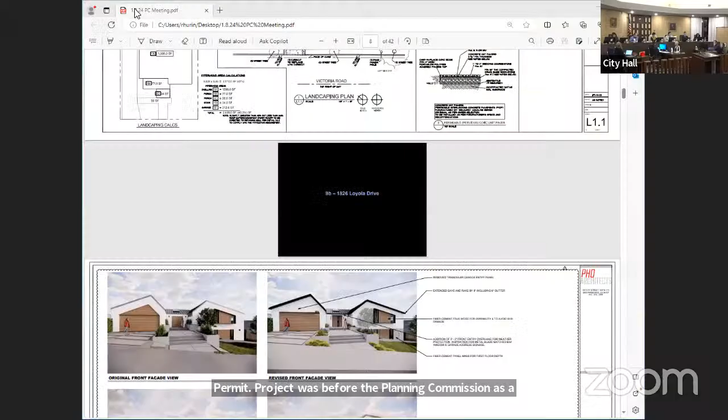The project was before the Planning Commission as a study item on July 10th, 2023. The applicant has made changes to the project based on the commission's comments at that hearing, and those changes were detailed in the response letter that was part of the attachments for the project. The applicant also had story poles installed and certified for the project.

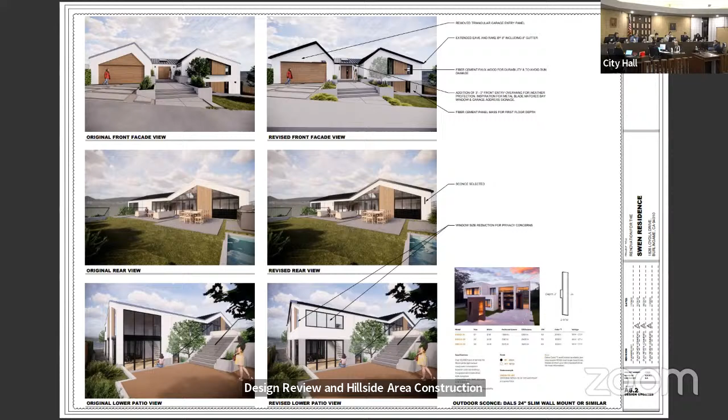There are suggested findings for both design review and hillside area construction permit in the staff report, and I can take questions of staff at this time. Great, thank you. Do we have any questions for staff?

Okay, seeing none, I'm going to open the public hearing. Would the applicant please come forward and state your name and anything else you would like to add about your project?

Hello, my name is Daniel from PHD Architects. Good evening, commissioners and staff. Appreciate your time tonight. Hope everyone had a wonderful holiday. Happy New Year, actually, as well.

We're here to present the single-family home renovation project for 1826 Loyola Drive on behalf of the clients. We appreciate the opportunity to follow up on our design study review that we had on July 10th last year for the project, and the opportunity to address the feedback we received.

Since that hearing, we've worked with the homeowners on updating our proposed design for the project and incorporated all the feedback you guys provided while still retaining the overall modern aesthetic of the design. During this period, we also worked and diligently reached out to staff as well as commissioners to review our project individually through Zoom meetings. I appreciate that we were able to meet with many of the commissioners, so thank you for that.

Tonight, I'd like to spend a little bit of time reviewing the planning response letter we prepared, which we also put together with the package for the entitlement plans, to show how we addressed each of the commissioners' items with respect to the project.

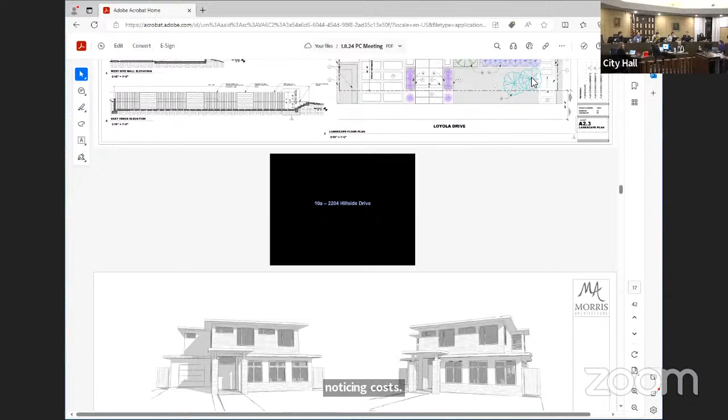Were any commissioners not able to visit this project, or do any commissioners wish to note any ex parte communication regarding this project? Seeing none, let the record note that all commissioners present have visited the project site.

Can we hear the staff report, please? Yes, the applicant is proposing to replace the existing split-level single-unit dwelling at 2204 Hillside Drive with a new two-story single-unit dwelling with an attached one-car garage. The applicant is requesting a special permit for the attached garage. The project includes a new detached accessory dwelling unit, or ADU.

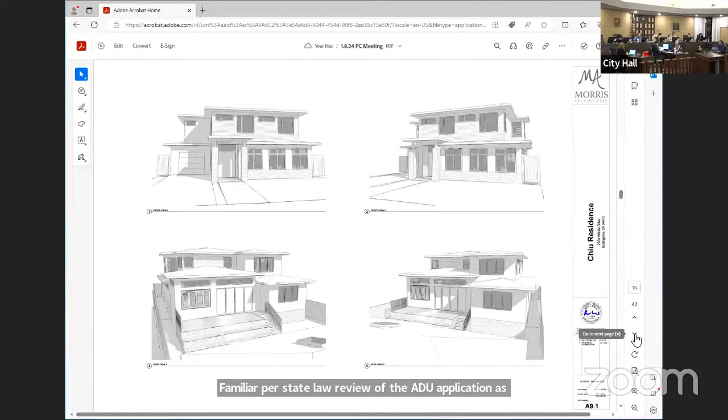For those who are not familiar, per state law, review of the ADU application is administrative only. Staff has determined that the ADU complies with the ADU regulations. So in summary, the applicant is requesting design review for a new two-story single-unit dwelling with an attached garage, and a special permit for that new attached garage. The applicant is available to answer questions, but first I'm available for questions of staff.

Thank you. Do we have any questions for staff? Yeah, I just wanted to clarify. At the rear of the house, is the first floor has an 11-foot plate height? I'm sorry, I forgot to bring my reading glasses, cannot read anything here. 11.3 plate height? Correct, so that's... perhaps we can ask the applicant, only because I don't have the plans with me myself.

That's maybe a good question for them to help answer. That's my question mainly, is that doesn't have to come as part of the staff report. That doesn't need to be notated or doesn't require anything special. Special permit, yeah, does it? That plate height at the rear? I'd have to see the plans, but generally there's stipulated plate height for first and second floor, and anything beyond that, 11 feet would be beyond that and would require special permit.

Yeah, so that's why I have the question, because it looks like it has the 11-foot. Is it part of the ADU, on the rear? No, it's the back of the house. Okay, on the rear elevation, we'll have to check on that. Doesn't it say first floor plate height 9 foot? But on the rear it goes higher. Well, we can ask them. Okay, well, we can ask them. We can certainly look into that and get a response for when this returns. This is a study item at this stage.

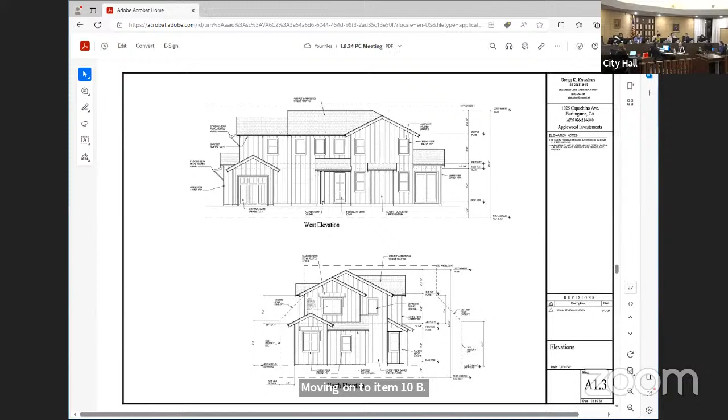Moving on to item 10B, 1025 and 1029 Capuchino Avenue. Were any commissioners not able to visit the project site, or do any commissioners wish to note any ex parte communication regarding this project? Seeing none, let the record note that all commissioners present have visited the project site.

Can we hear the staff report please? In 2017, the Planning Commission approved a project on this site for design review, conditional use permit, and front setback variances for a total of 4 units. The design was 2 attached duplex units on each lot. The permit to build the original project has expired, and the new owner is requesting design review, front setback variances, and a minor modification for parking space width for 4 units, or 2 detached units on each lot.

The site consists of 2 interior lots that are zoned R2. There's an existing underground culvert that runs across the site, extending from the front left corner of 1025 Capuchino Avenue to the rear right corner of 1029 Capuchino. There's a 10-foot public utilities easement that runs behind the rear property line of both lots. Public Works Division regulations do not allow any permanent structures to be built over the culvert or over the easement.

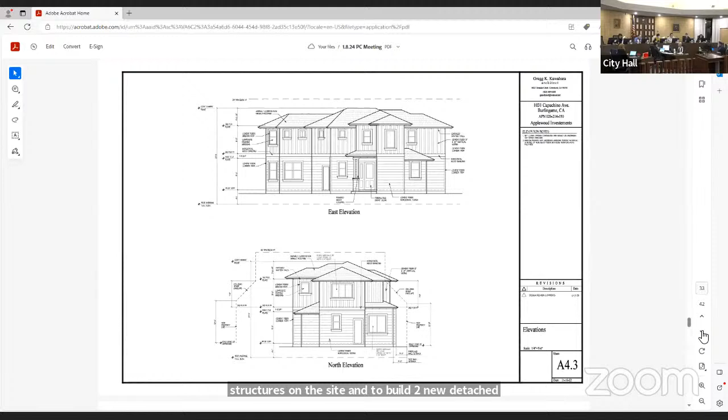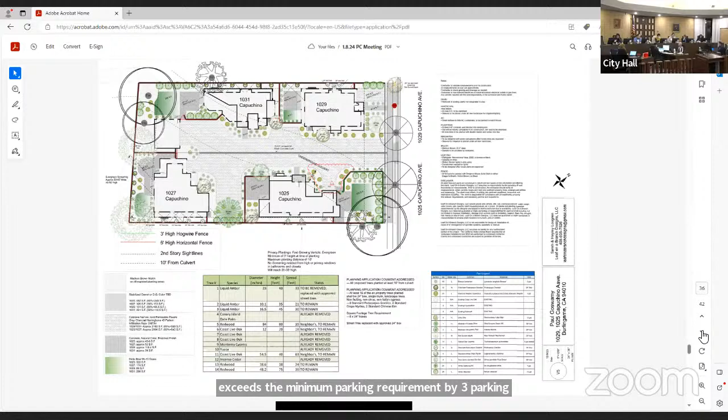The applicant proposes to demolish all of the existing structures on the site and to build 2 new detached 2-story condominium units on each of the 2 pre-merging lots. All of the units will have attached garages except for the rear unit on 1029 Capuchino Avenue. Each unit contains 4 bedrooms, and the proposed project exceeds the minimum parking requirement by 3 parking spaces at 1029 Capuchino and by 1 parking space at 1025 Capuchino.

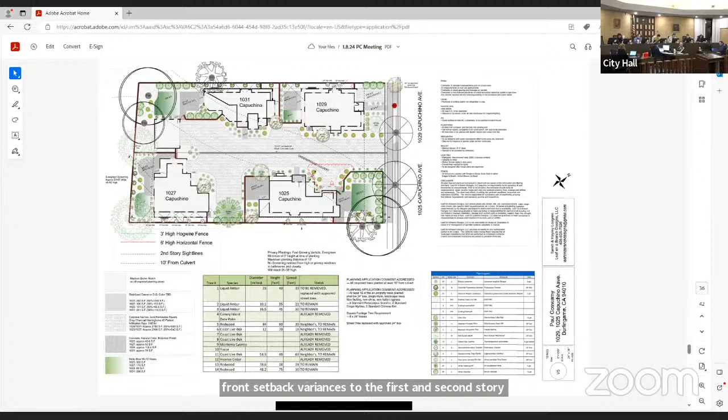The average front setback for the block is 34 feet 11 inches, and the applicant is requesting front setback variances to the first and second story of the front unit at 1029 Capuchino Avenue, and to the first floor only of the front unit at 1025 Capuchino Avenue. A minor modification is also requested for the covered parking width in the attached garage of the front unit at 1029 Capuchino Avenue. The proposed covered parking space is 9 feet in width, where 10 feet is the minimum required.

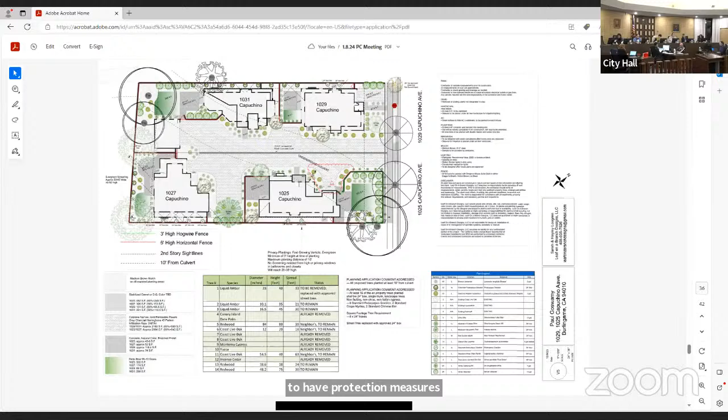The applicant provided an arborist report for the site, updated October 21st, 2022. The lot at 1029 Capuchino Avenue contains two existing protected size redwood trees at the rear of the lot, and these are proposed to remain with construction and to have protection measures installed. One of the three existing street trees in front of the site is proposed to be removed with the project, and the applicant has submitted a protected tree removal permit with the Parks Division for this tree removal.

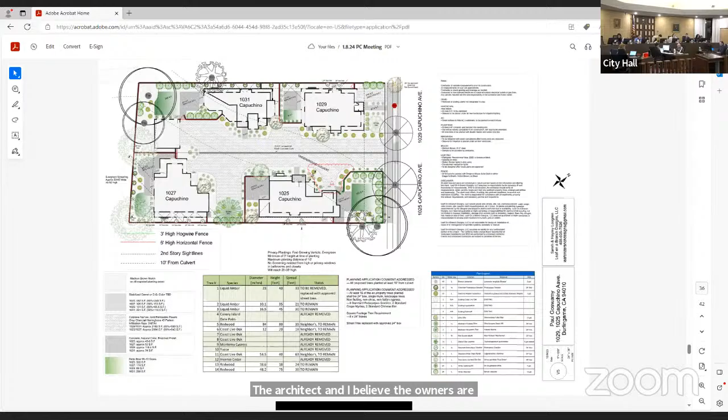Each of the units has a different architectural style, and the proposed exterior materials for the 4 units are listed in the staff report. The architect and, I believe, the owners are present this evening to answer the commission's questions, and I can take questions of staff at this time. Great, thank you very much. Do we have any questions for staff? Commissioner Comaroto?

Do the buildings need to, are the setbacks of the buildings accurate as it relates to where the culvert is, how the culvert is running? So no, the setback is based solely on the average of the block. That's how we came up with the 34 feet 11 inches, as opposed to a 15-foot minimum which is required in the code. So it actually has, the 34 feet 11 has nothing to do with the culvert. But I think that it would be difficult to get 2 units on each site without extending into that 34 feet 11 inches.

Do we have any ordinance that talks about the setback from the culvert? Because I know in Hillsborough, you can't be within 5 feet. Oh, I see what you're asking. I will check with our Public Works Division. It wasn't noted in their review of the project. Okay, I was just wondering if there was some concern with how that culvert runs.

Commissioner Tse asked the same question - I see there's a whole set of civil drawings. Are the civil engineers responsible for finding out if there's any setback to a culvert, like when they're designing their grading, drainage, and erosion plan?